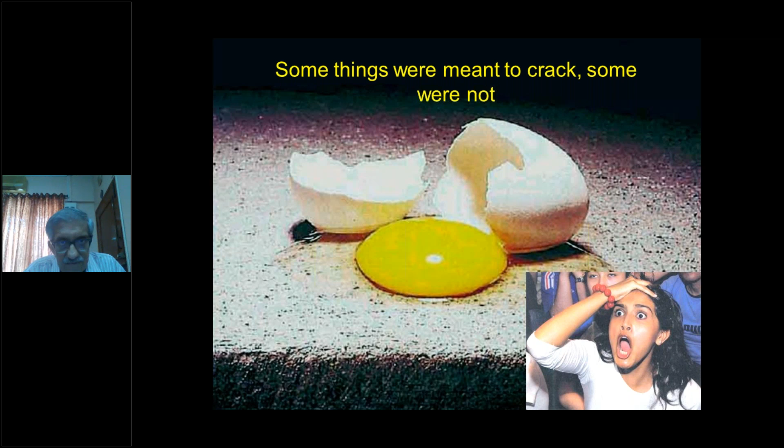We know some things were meant to crack, like the egg we have on the breakfast table. The shell suddenly cracks. Similarly, cracks come in concrete too.

Concrete is made up of two ingredients, water and cement. And when water leaves concrete, because we put additional water for workability, in addition to what water quantity is required for hydration.

On the photograph, you see an egg is cracked before it enters the frying pan. And in the right hand corner, you see a girl has cracked up. She's from Brazil, and Brazil has just lost the football finals.

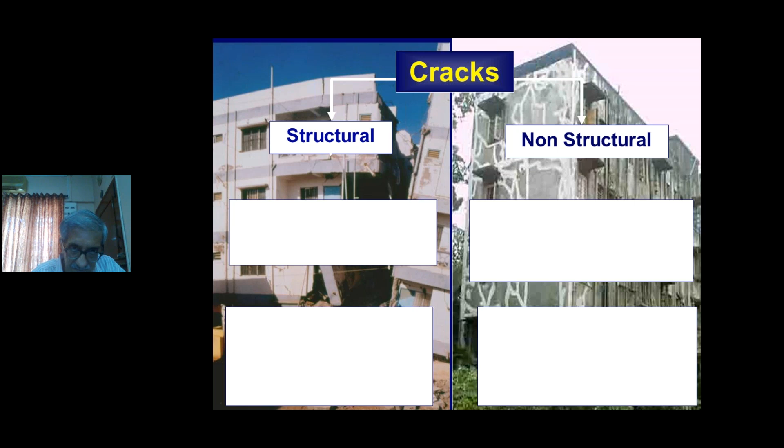Cracks are of two types, structural and non-structural. Structural are due to externally imposed load. Non-structural are due to intrinsic reasons, the nature of constituent materials, like I told you, water, cement, etc.

Limiting factors for structural cracks are structural integrity, the structure must stand, it should not collapse, and aesthetics. Nobody likes to stay in a cracked up structure. Like nobody would like to marry a cracked human being.

Limiting factors in non-structural is good design. Design means maybe even architectural design as well as structural design and concrete mix design. Proper construction is also very, very important. Proper construction includes skilled workers as well as the skill supervision, experienced and trained supervisors.

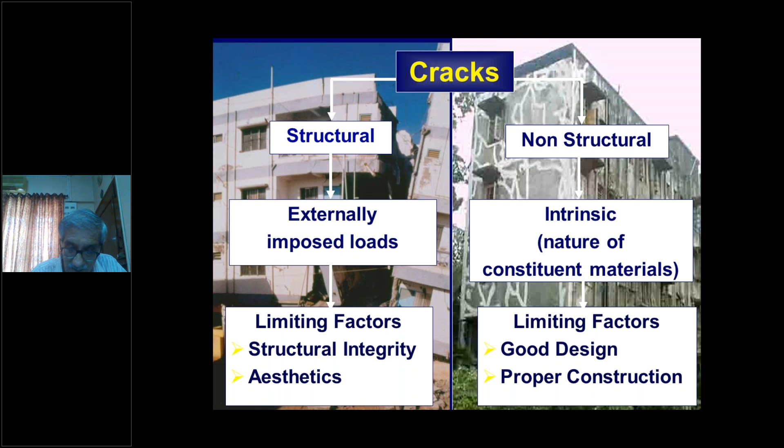Why do you like to control the crack width? First is appearance. The structure must look beautiful without any cracks. Second is the durability, because once cracks come, they widen, or even if they don't widen, they allow the moisture from outside, chemicals from outside to attack both concrete and steel.

Another thing is water tightness. During the monsoon, we would only like water to come from the taps and not from the roofs.

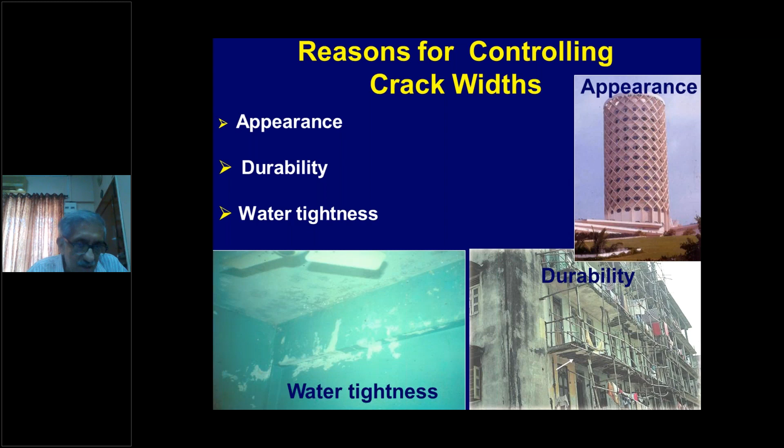There are two slides in my presentation which I will take a little longer than others. One is types and causes of cracks when concrete is in a plastic stage. When concrete is in a plastic stage, it is like a young child, has to be protected properly.

The reasons for the primary cracks, or what we say as the shrinkage or the initial cracks, come one due to constructional movement, second settlement shrinkage, and third is setting shrinkage. I'll deal with one at a time.

Constructional movement can be due to subgrade or due to poor formwork. Settlement of subgrade happens, that is the cause. Moisture changes the subgrade, lack of compaction of the subgrade, and remedy could be you must compact the subgrade and control the moisture coming into the subgrade.

Otherwise, the props supporting the formwork will start settling and you can have cracks or even a formwork failure. The formwork problem, movement of formwork can happen, swelling of wood or pressure due to wet concrete. Concrete exerts hydraulic pressure, and therefore it has to be properly designed not only for the vertical loads but also for the horizontal loads. Construction of adequate forms is therefore a very important remedy to avoid constructional movements.

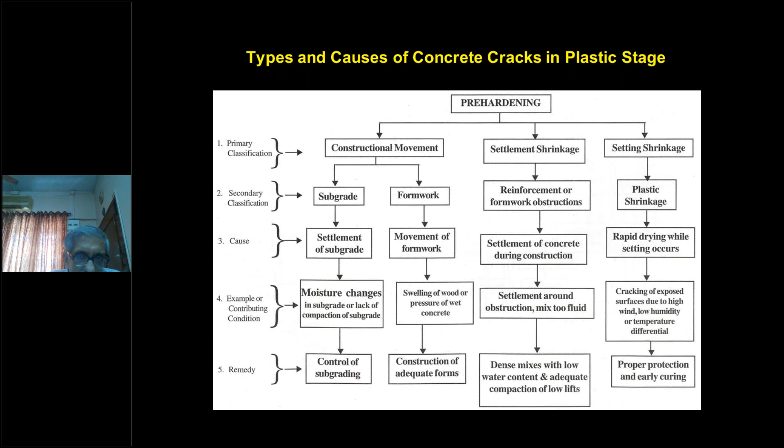Many times people do curing by several methods, sometimes totally inadequate methods, which I'll show you, and the slab develops cracks. Mind you, concrete is very young at that time, so these are through and through cracks, and very easily they will allow rainwater to seep in.

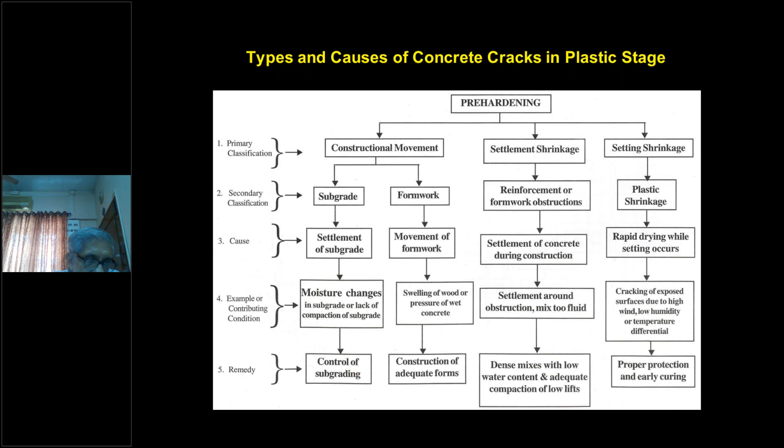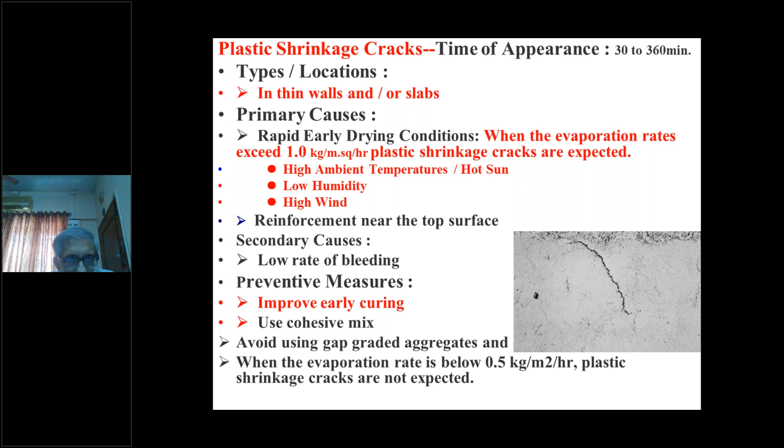We'll deal with a little more detail on plastic shrinkage cracks. Mind you, they occur within 30 to 360 minutes - it may take a little longer or it may take even shorter time. So what one must do is be prepared when casting thin walls and slabs to protect the concrete surface immediately.

It is experienced that when evaporation on the surface of the concrete exceeds 1 kg per square meter per hour, plastic shrinkage cracks are expected to occur, and this is generally so in almost all parts of our country, India. It also includes Sri Lanka and various other places where they have reasonable winters and other seasons are only warm and hot summers.

Reasons include high ambient temperature, hot sun, low humidity, and high wind. Often people ask why you need curing during the night. The obvious reason is that wind and low humidity cannot be escaped - it may happen at night also. Maybe the hot sun is not present, but loss of water is expected to take place. Reinforcement near the top surface can also cause this cracking.

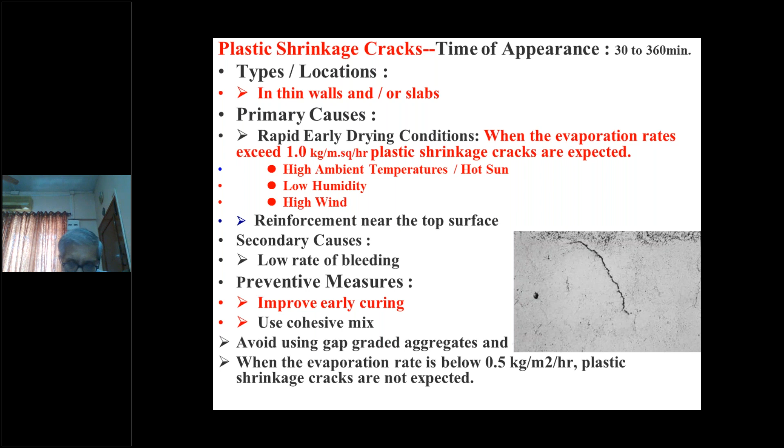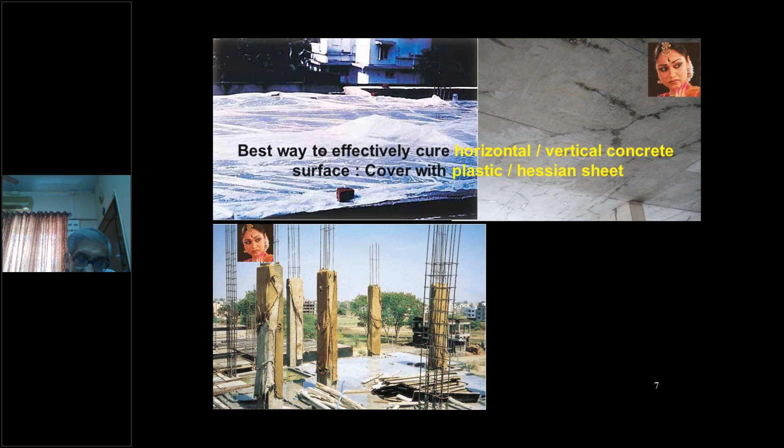So we recommended to the client who was blaming our cement, when I was working at Ambuja Cement, to put a plastic sheet. The next slab we cast in our presence with the plastic sheet, and you can see how beautifully it has come out. Not a single crack. You will be searching for the crack.

Even the vertical curing should be done with a proper cover of Hessian cloth. If you are lazy to do proper curing of vertical surfaces, maintain the formwork for some time. Mind you, it should be wooden formwork and not steel formwork, otherwise that will generate heat and you may get cracks due to that also.

So you must cover your concrete like a young child, protect it initially, and you will get good results, both from your child as well as from your concrete.

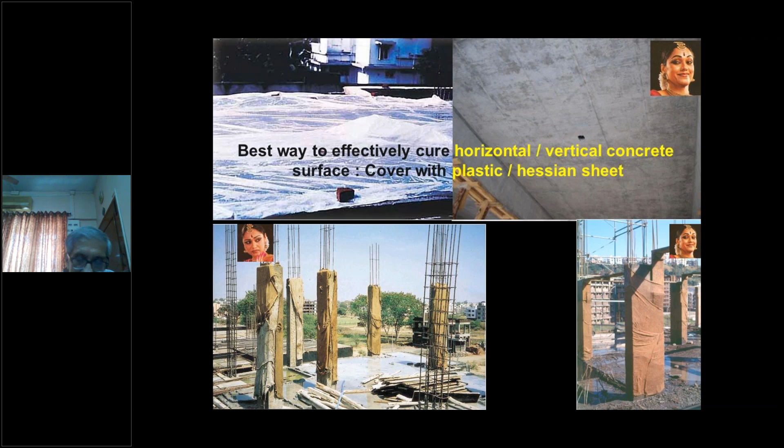I had spent quite some time in Kerala giving lots of lectures, etc. At one site I came across, which was plumb opposite a lagoon, you could say water everywhere, but not a drop to drink for the concrete. Because in Kerala, they had put a tin on one of the sites, supposed to be filled with water, but there was no drop falling on the concrete.

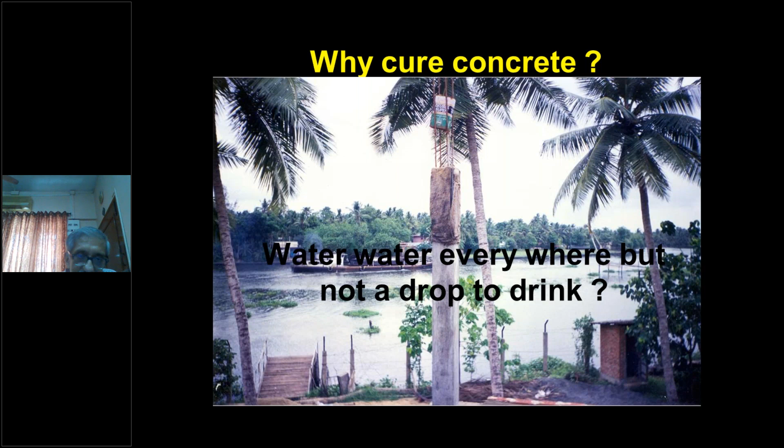So I asked the supervisor standing there, what is this for? When do you put water? He said, once in a way, when we climb a coconut tree and see the water is not there, we pour it. This is not the way to do curing anywhere. Otherwise the concrete will give you poor results.

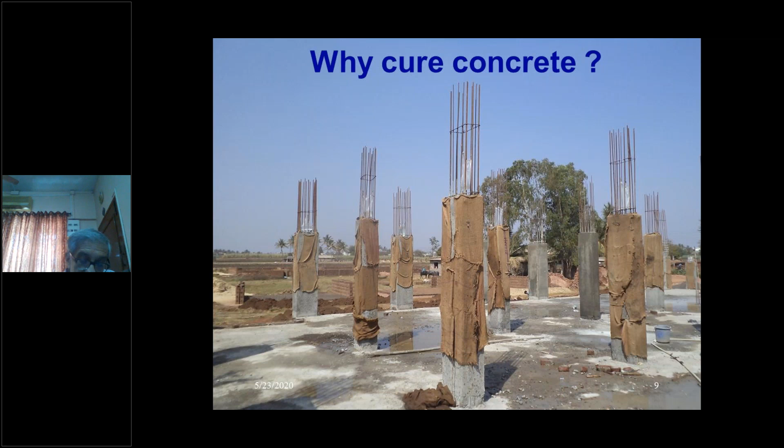Instead of putting a tin, in rural areas of Bombay, there are very few of them now, people building their houses, etc., put plastic bags with water on top. You can have a closer view. I call it poor man's curing, or concrete on glucose saline.

Again here too, there is no drop of water falling. The Hessian is dry and it's not going to protect or cure your concrete. So these sort of methods are not permitted or allowed. You have to do proper curing continuously for 7 days, day and night.

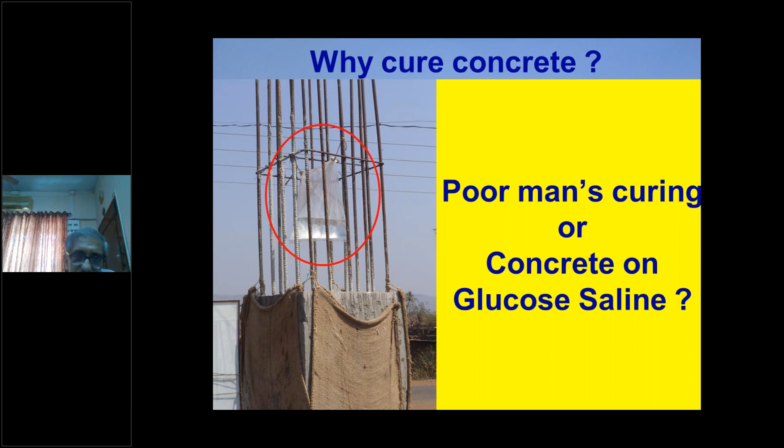Other properties, types of causes of concrete cracking after the concrete has hardened. Now mind you, concrete will harden either within a few minutes depending on the ambient temperature, or it will take sometimes days. But generally curing is specified for 7 days. If you are using pozzolanic cement or pozzolanic material like fly ash and slag, then IS recommends longer curing periods, maybe even 14 days.

If you are constructing roads which have a huge area compared to the volume of the road or pathway, then of course you have to cure it for even more than 14 days.

Initially, Mumbai's concrete roads started during the days of municipal commissioner Mr. Tinaikar. The municipality had recommended 28 days curing. As a result, even after the road was cast and the concrete laid, it was not allowed to be used for 28 days.

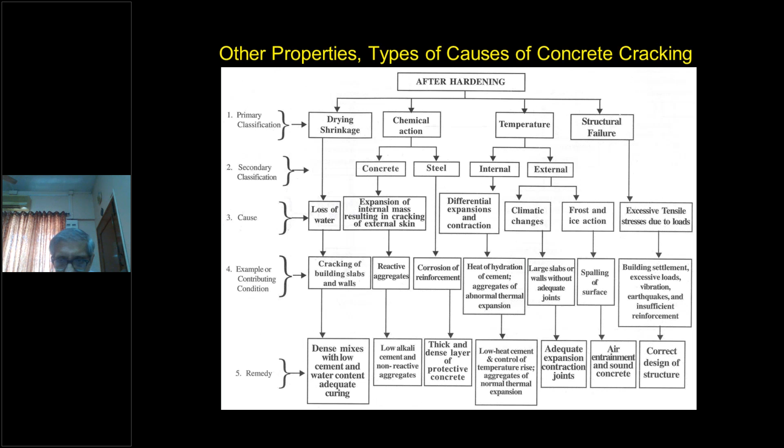So in short, we say correct design of the structure vis-a-vis which earthquake zone the structure is in, what type of climatic condition the structure is in - the structural engineer has to design it properly, taking care of all these environmental as well as earthquake conditions.

And when the first cracks came in the walls of the basement, they all blamed it on our 53 grade cement. So I was summoned to the site. I went there with my engineer.

We were seeing the cracks, and the consultant was also made to come from Delhi. While we were observing the cracks, I observed that the concrete had cracked every 6-meter interval. Every 6-meter interval.

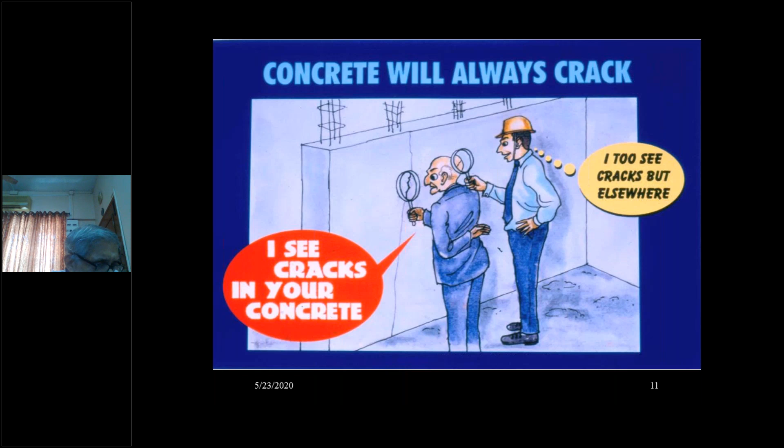The design also is a very, very important aspect. And I therefore tell the site engineers not to be easily bulldozed by the design engineer saying that the crack has happened because of poor construction. And hence this cartoon.

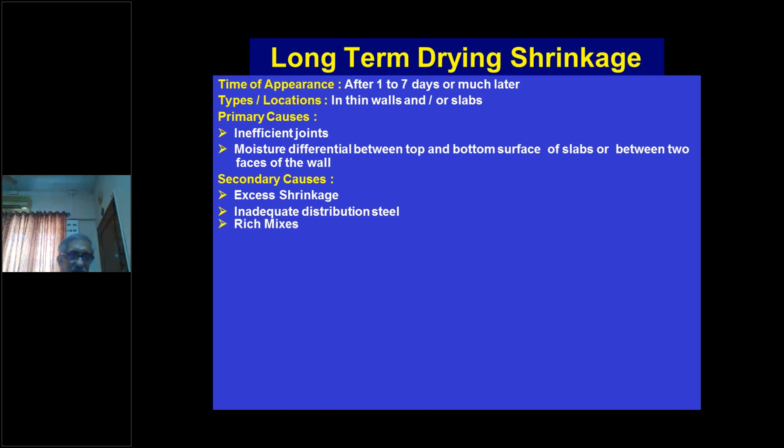Now we go into the depth of long-term drying shrinkage. It happens generally after 1 to 7 days or much later. It happens on thin walls or slabs, mainly road slabs, pavement slabs, etc. Primary causes are inefficient joints - I told you already this as one of the reasons for cracks.

Moisture differential between the top and bottom surface of the slab, or between two faces of the wall. One face may be facing the eastern side, so it will get heated up in the morning, and the western side will get heated up in the afternoon, so there will be a differential temperature.

The slabs which are flat on the ground or in the buildings - especially pertinent to road slabs - due to the differential between the top and bottom surface, the slab, though not very visibly seen, takes the shape of a saucer. The extreme thing would be like a saucer.

Now why does that happen? Because there is more moisture loss at the top and less moisture loss at the bottom. The bottom of the slab of the road is touching the ground and it gets lifted up without cracking. And when the moisture differential reduces, it goes back to its normal position.

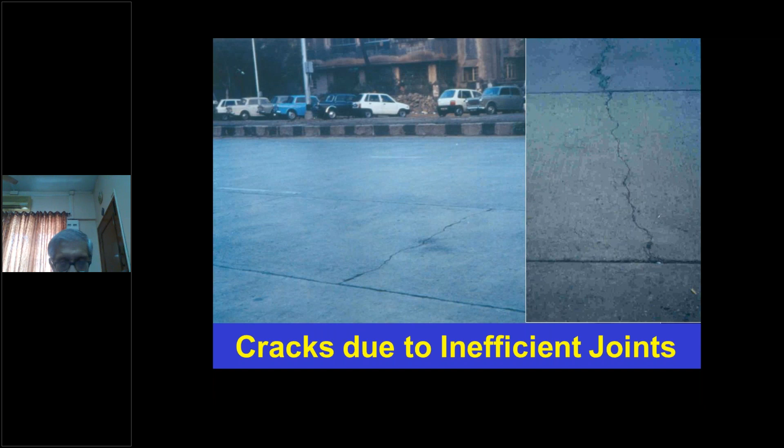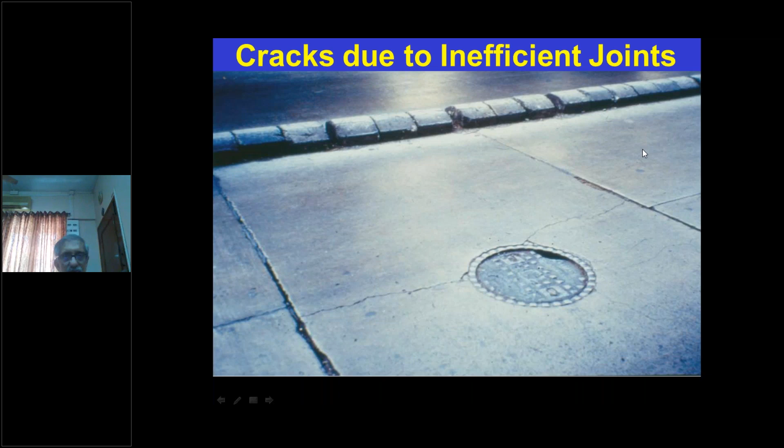Further, cracks can be classified in two ways: dormant cracks and live cracks. Dormant cracks are cracks where width will remain constant. For example, shrinkage, once it occurs, it cracks the concrete and the crack remains almost the same. But the danger is it will allow water, moisture, and chemicals in, causing durability problems. Temperature gradient cracks also are dormant cracks.

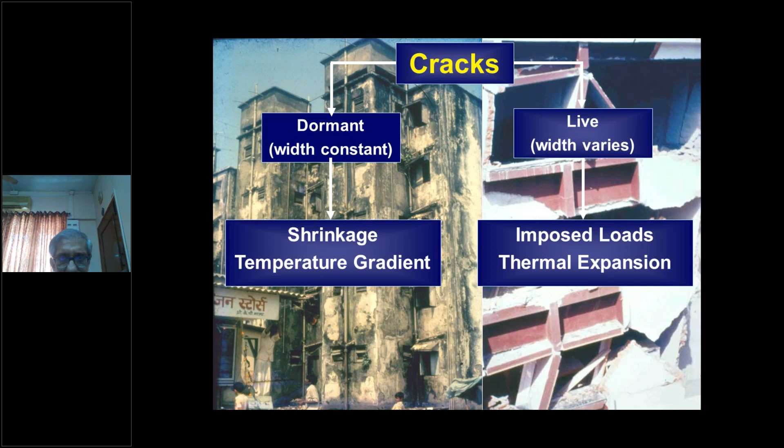But live cracks are due to imposed load and thermal expansion and contraction. An imposed load could be due to earthquake, or due to addition or alteration, or an addition itself of a heavier type, and therefore these cracks are live cracks and dangerous.

The best way to judge a crack is at the age at which it appeared. So it is always very important that the consultant must visit the site of repairs. And if it's an occupied building, ask the occupants, when did you see this particular crack? And if the occupants say, oh, we have seen it right from the day we occupied it, then it could be a plastic shrinkage crack or plastic settlement crack.

Or if the occupant says, no, we saw it about 2 years back, it could be a corrosion crack, or it could be due to extra load somebody has put in the building, or if there are different types of cracks called settlement cracks, which I'll show you a little later, this could be due to removal of early formwork and support system. So that could be initial.

Or if it has taken many years or few years, maybe depending on the type of concrete and the precautions you take during construction, it could be due to chemical attacks from outside, or chemical reaction from within, like the alkali silica reaction. So depending on the age, the engineer can guesstimate or realize what type of crack has appeared in the building for which he is being consulted.

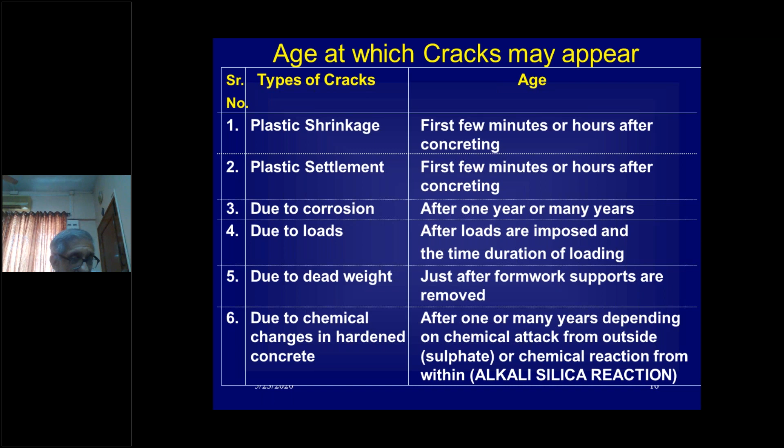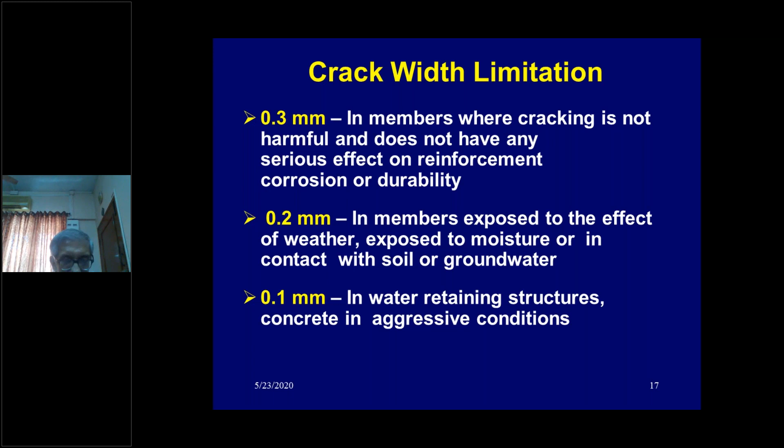If you see IS 456, it recommends crack width limitations from 0.3 mm to 0.1 mm. The 0.1 mm is for water retaining structures, concrete in aggressive conditions. 0.2 mm is for members exposed to the effect of weather, exposed to moisture, or in contact with soil and groundwater. And 0.3 refers to structural members where cracking is not harmful and does not have any serious effect on reinforcement corrosion or durability. So these are the various crack limitations.

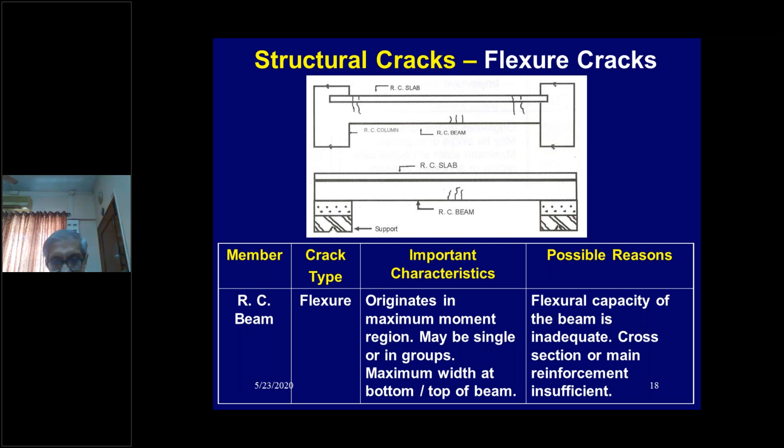Now we go into some structural cracks. The first and foremost is the flexural crack. This crack occurs in beams and sometimes even in slabs, originates in the maximum moment region, may be a single or a group of cracks, maximum width at the top and bottom, like you see in the sketch here. If it's a fixed end moment, then it can occur at the top also. And if it's a free span, then it can occur at the bottom. Flexural capacity of the beam is inadequate, cross section or main reinforcement insufficient. So these flexural cracks have occurred mainly due to the design.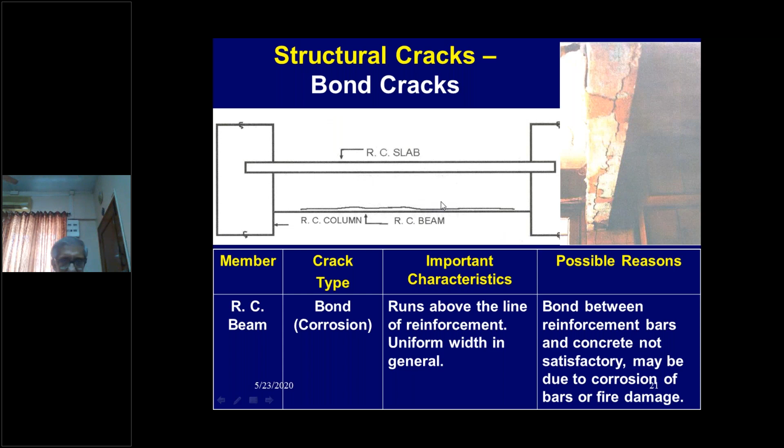Many a times there are construction joints. You see, we make an RCC framework and build the wall inside. And the wall expands and contracts in a different way than the RCC framework, and therefore you have separation cracks. Now, many a times the wall is not constructed properly from the outside, etc. So there are obvious large separation cracks appearing and allowing even the leakage of water during the monsoon inside, because there are lots of gaps left, and a hurriedly done plaster from the outside, maybe in only a single coat, etc., without first sealing all these joints.

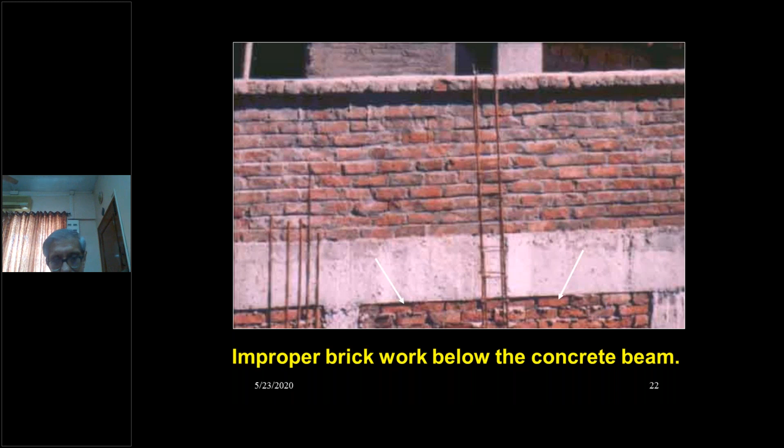So it's very, very important that when you are staying in a building where bricks and blocks are used to make walls, you must be very careful that before you do the plaster, you pack all these defective joints from the outside, because the water comes from the outside, not from the inside. Seal the cracks, cure them for at least 3 to 4 days or 7 days, and then do your first coat of plaster, and later on do your final coat of plaster.

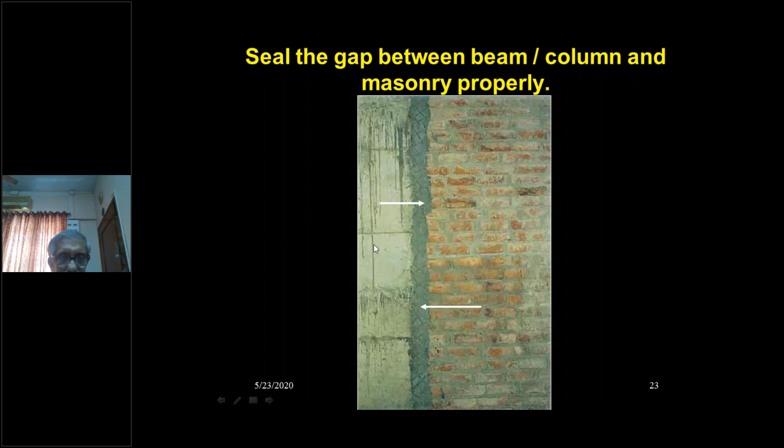This is the way you have to pack the joint between the brickwork and the RCC.

Sliding cracks occur because the formwork from below the beam during construction was either accidentally removed, or removed with full intention of making use of it at a higher elevation of the building, causing the beam to settle. Or this happens at the supports.

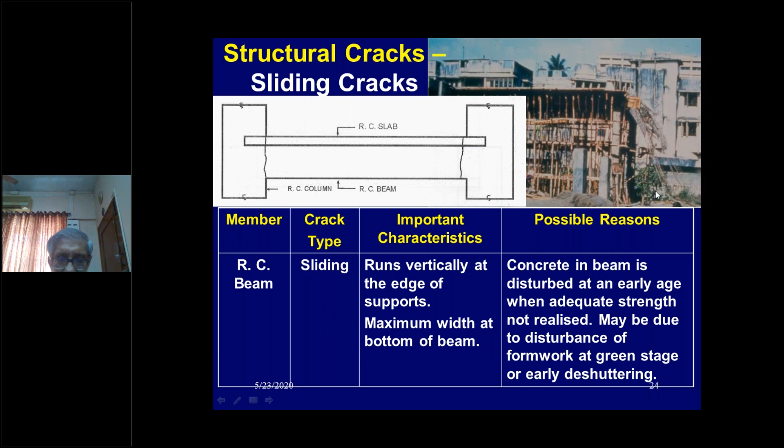These are right-through cracks due to disturbance of the formwork when the concrete was green, or due to early de-shuttering. Like this, sometimes the sliding will be very high and the entire structure will collapse.

Structural cracks, tension cracks. Unfortunately I don't have a photograph. I missed one opportunity when such cracks had appeared somewhere in Navi Mumbai. One of my engineers, who had changed his job and was working for a builder, telephoned me and said, 'Sir, there are cracks which are parallel to each other.'

I told him this could be due to tension in the beam. I asked him, 'Was it a concrete truss which had one of the beams cracking like this?' He said, 'Yes sir, it is a truss of a building, an RCC truss.' So I said, 'Find out from the consultant whether the member which has cracked is a tension member and get the design corrected.' He came back and told me, 'Yes, it is a tension member.'

So I said, 'Then your design has to be corrected, it has failed in tension.' Normally in our buildings we don't see such failures because the beams are not under tension. But in a truss, where some beams are under compression and some are under tension, this can happen and can be a serious problem, not only of durability but also of failure.

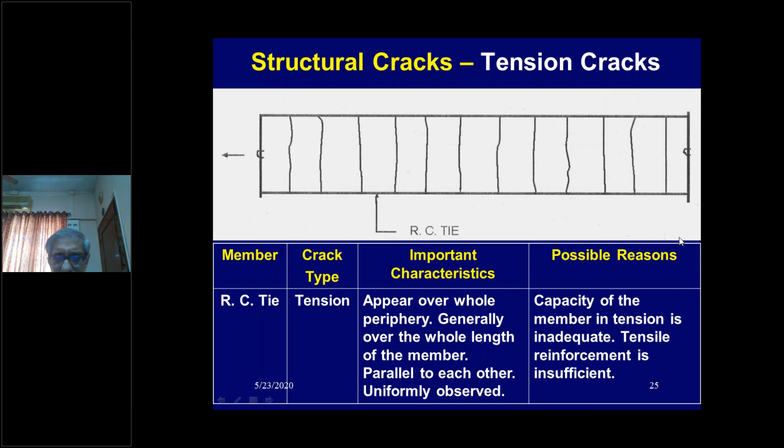Now we go to columns. Columns can crack by splitting. You can see here there are rolling shutters on either side which are now supporting the column. This column has completely failed.

During the earthquake in Bhuj, in Gujarat, many columns failed like this. The problem was that though the columns were using high yield tensile steel bars, the steel supply was coming from re-rolling mills, and the scrap was maybe mild steel or some other steel rolled into a bar that looked like a high tensile steel bar.

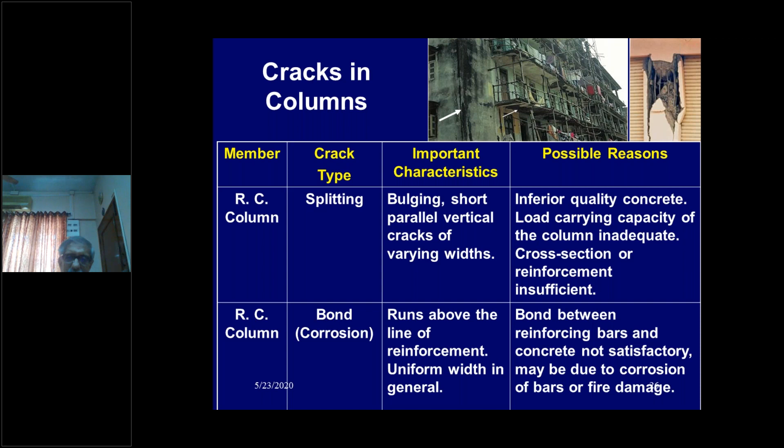Many times people in the construction industry, the masons and carpenters in charge of the building, were not engineers. They thought stirrups in the column were only to support the vertical bars until you concrete the column, so they put them at any spacing. During an earthquake, stirrups play a very important part in stopping a column from failing, but here the stirrups are either very far apart or not of adequate strength, and therefore they just separated from the concrete.

Due to the load coming from the top of the building, the concrete actually got crushed, and it looks like a cube failing in compression without any steel. So this is a crushing failure, and the entire column has split. Therefore this building cannot be repaired, it has to be reconstructed. There are several columns like this, but fortunately some columns failed and some did not. I really don't know what has happened to the final state of the building.

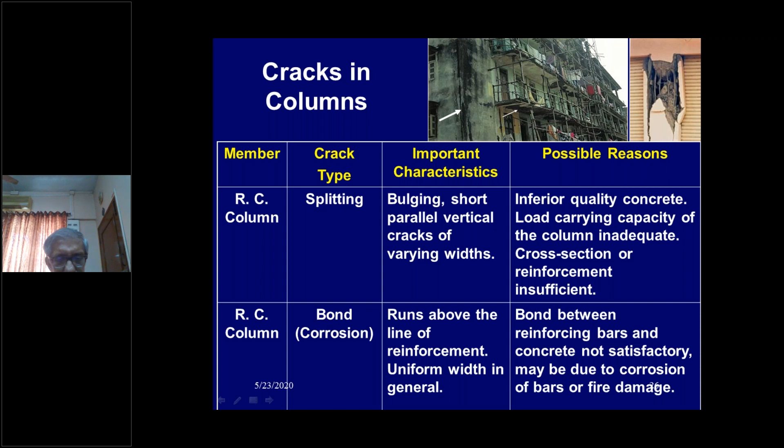Another type are the bond cracks, wherever there is corrosion. Here there is more corrosion in the balcony slabs etc., due to thinner sections, less cover, and more exposure to rain. There are cracks in the column too. So the bond between reinforcement bars and concrete is not satisfactory, maybe due to corrosion or fire, but here it is due to corrosion.

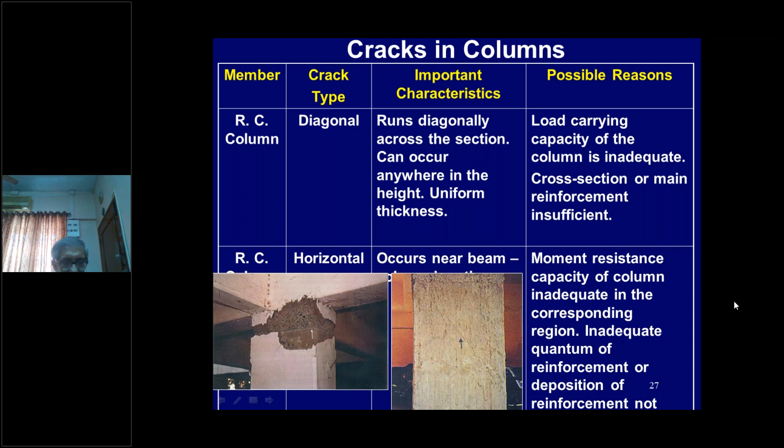The others are horizontal joints. Generally we construct a column up to a certain height, then put beams and slab on top with a small region of the column, what we call 'column ka topi', the cap of the column. Luckily here only the plaster peeled off, and the construction joint showed a visible horizontal crack, but the concrete was good and solid, so they could restore it by replastering the building at the basement. No need for very laborious repair, because it was only a construction joint exposed due to the shaking of the building during the earthquake, and some plaster peeled off.

Now let's go through this Tuutti model. It was developed by Tuutti, I don't know the exact year, but you can see there is an initiation period T1 and a propagation period T2.

When concrete is born, it is alkaline. This alkalinity around the steel does not allow corrosion. It inhibits corrosion, so when chlorides or water start penetrating the concrete, for time T1 no crack appears. Once chloride and water enter the concrete, gradually the alkalinity is lost and corrosion starts, and it goes on increasing and increasing.

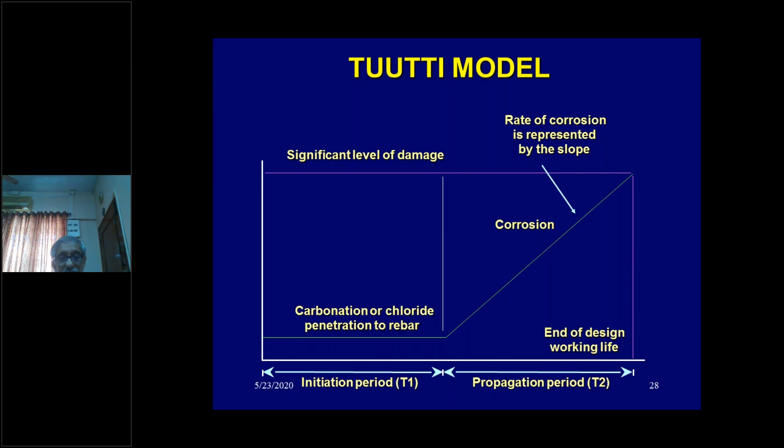This continues till the end of life comes and the building collapses. Suppose you repair the building at this stage - if the repairs are good, you can gain another T2 or T3 life, and then T3 will start later. So every time you repair a building sensibly and properly, you increase the life of the structure. And if there are structural cracks, just repairing will not do - you will have to strengthen the structure.

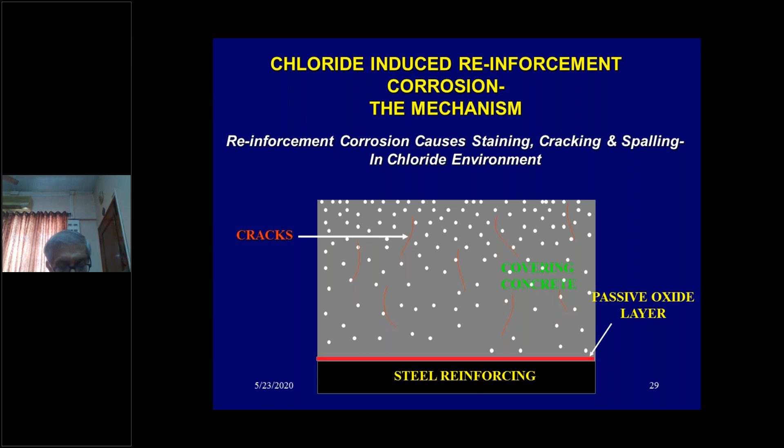There is a nice model made. You can see there is a passivating layer which does not allow the reinforcement steel inside the concrete to corrode. Even though there are minor cracks, they are all isolated. But when chloride and water start seeping in, the cracks unite and pass water onto the bars, and then you see flaws - reinforcement passivation is lost, and corrosion happens.

We always say united we stand, but for cracks you should say united you fall, because then they become dangerous. If the cracks are isolated and not united, your building can have an extension of life till they get united, maybe due to loading, unloading, water seepage, etc., due to any reason.

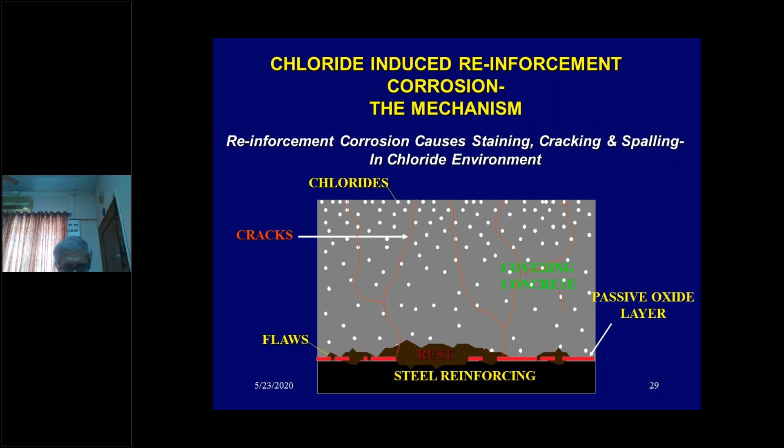This is a beautiful building, a PWD design - the ESIC hospital in Ahmedabad. This photograph was taken just after the earthquake. There were some patients in the hospital. The engineers felt that after the earthquake, a lot of spalling and cracking was observed.

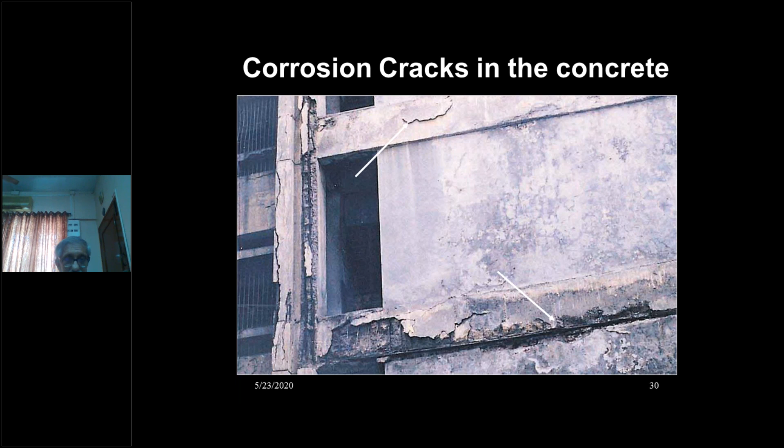So it was time to evacuate the hospital and tell the patients to leave and go to some other hospital. I'm showing this as an example where the design was good - the building did not collapse like many buildings in Ahmedabad, but it was just good enough to allow the people to leave. The main reason for such deterioration was poor maintenance. So it's very important that good design be supported by good maintenance if you want infrastructure like hospitals to survive the calamities human beings face.

This is a building - there were three buildings, and one of them collapsed in one of its wings sometime in '94. They are called the Poonam Chambers. Originally, the architect had made a nice facade with marble on top and some fins for architectural effect.

But it was facing the creek near Worli, a very corrosive environment, and maybe not constructed properly in those days. Therefore the concrete started spalling and the protection of the marble was no more. It also started falling on the parking lots and on people below.

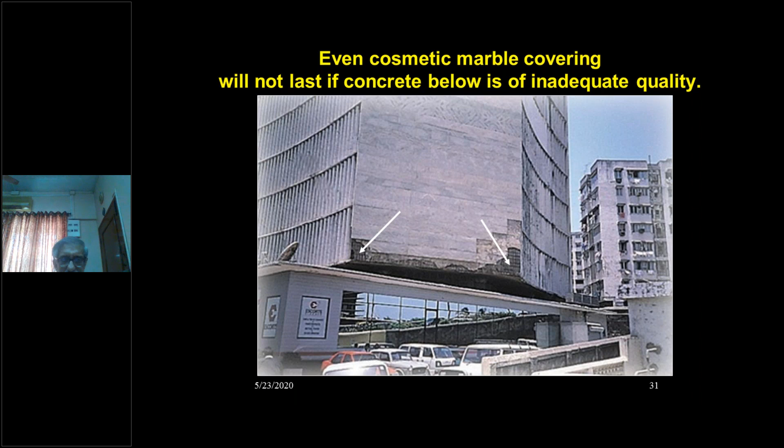After the collapse of the adjacent building, they decided to refurbish Poonam Chambers 1 and 2. They removed the marble, removed the concrete, removed the decorative fins, etc., and depended on steel and aluminum to give the facade of the building. So cosmetic effects don't last if the concrete below is not good.

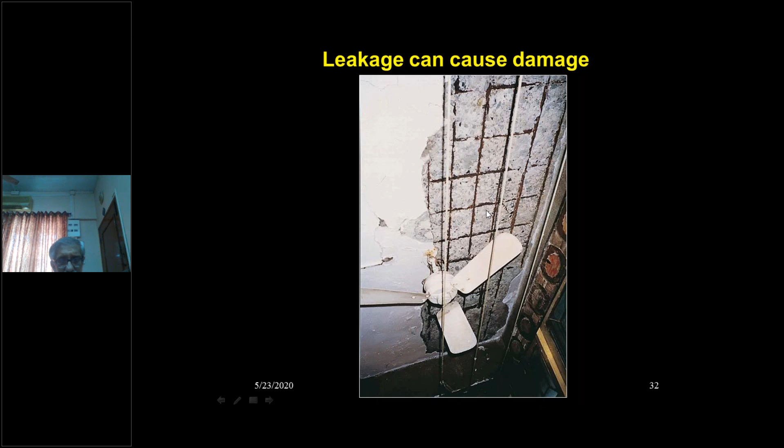Here you can see a typical slab of a badly damaged building due to monsoon but delayed repairs. We are lucky that the fan is still on the ceiling - it could also come down. This is all due to leakage damage, corrosion, etc., and spalling of concrete.

One important lesson I have learned is that curing is a must. You cannot neglect curing because it is the last step of concrete making. Curing is very, very important - it increases the life of the structure, because with good curing you can gain strength of the concrete, even of the plaster. A well-cured plaster without cracks can even afford some protection against future corrosion of the bars, etc.

It may not give you the strength a structural member gives, but it can give the protection that otherwise would not have been there if the plaster didn't exist or was badly constructed and cured. I'll give you one example: Chandigarh city. The well-known French architect Corbusier had designed most of the buildings when it was first built, and he had the fancy notion that we should make form-finish concrete - he specified everywhere form-finish concrete without plaster.

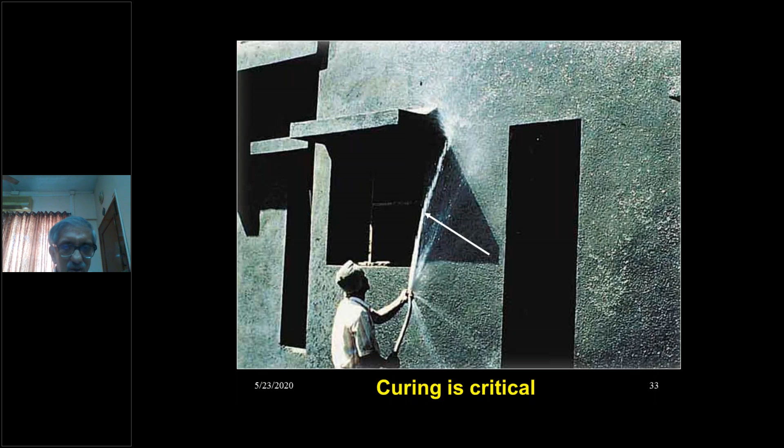After years, a lot of Corbusier's form finish concrete buildings had to be extensively repaired. Why? Because the plaster was not there. If plaster had been there, the form finish buildings would not have looked form finished, but like our normal buildings, and would have had protection. Chandigarh is not a place with excessive corrosion, but the concrete was designed that way. If they had used the high strength concrete now specified for high-rise buildings in Mumbai, it could survive form finished, but M20 and M25 grade concrete cannot. I'm sure this must have been M15 or M20 grade concrete when Chandigarh was built.

Now we come to the fancy part of my presentation. I could not get all the photographs, so I have made sketches and given them.

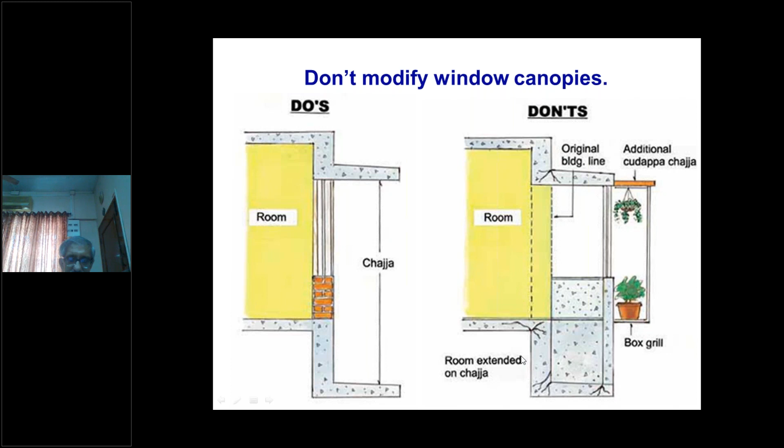This shows how carelessly people or occupants modify their buildings - the do's and don'ts. On the left is the original chajja and window. Some occupant, without the architect or engineer knowing, wanted sitting accommodation, so he added concrete on the chajja, which was a cantilever, loaded it, made a sitting arrangement with pots to beautify. But the original chajja was not designed for this, so cracks developed. People do lots of architecture of their own and destroy the building.

A balcony is kept for people to see the beautiful birds and trees outside. But somebody in the family got married and needed an extra bathroom, so they converted one of the balconies into a bathroom. Can you imagine putting this heavy bathroom utilities inside a cantilever slab? Then they do plumbing, and the balcony at the lower elevation leaks, so neighbors complain. One has to ban all these additions and alterations.

Many buildings have had their life curtailed because of erratic additions and alterations. The municipality has now become more strict, at least in Mumbai, but I hope this strictness also culminates in stricter action against people who do this sort of additions and alterations.

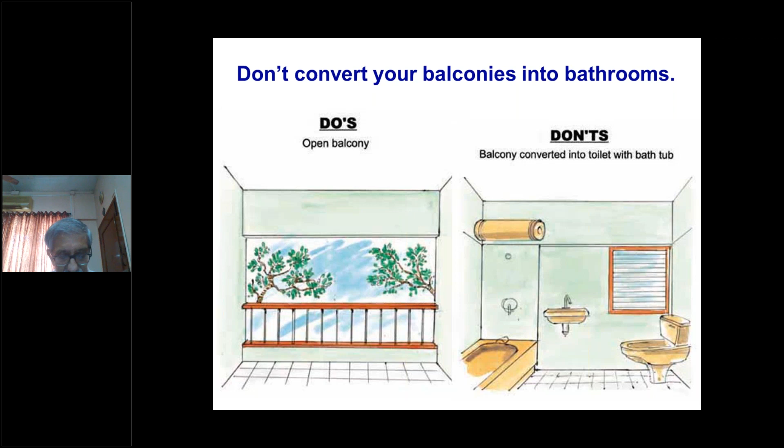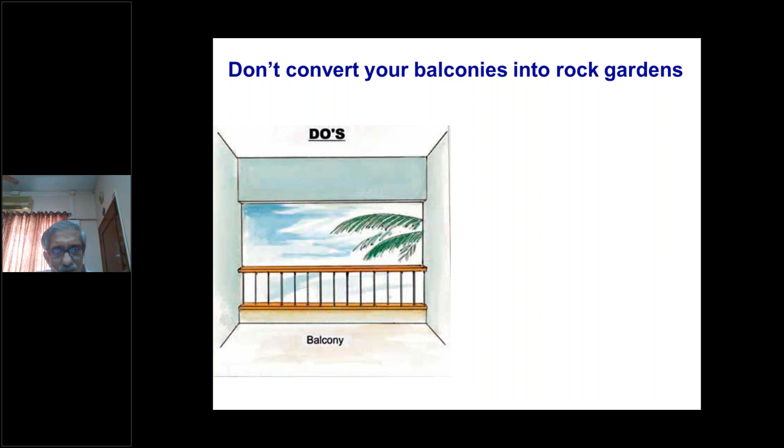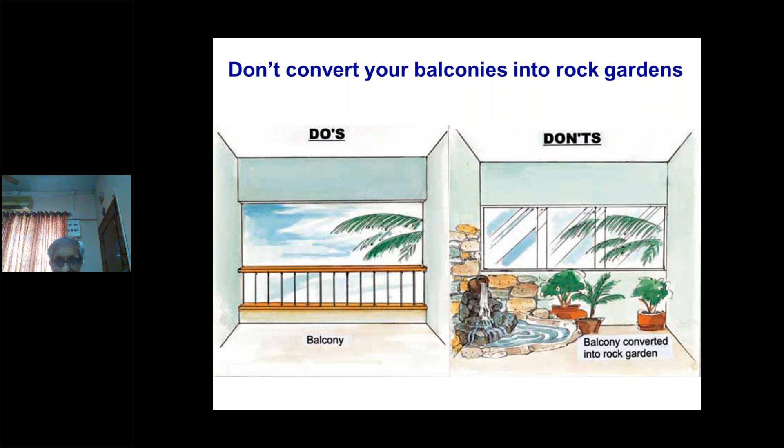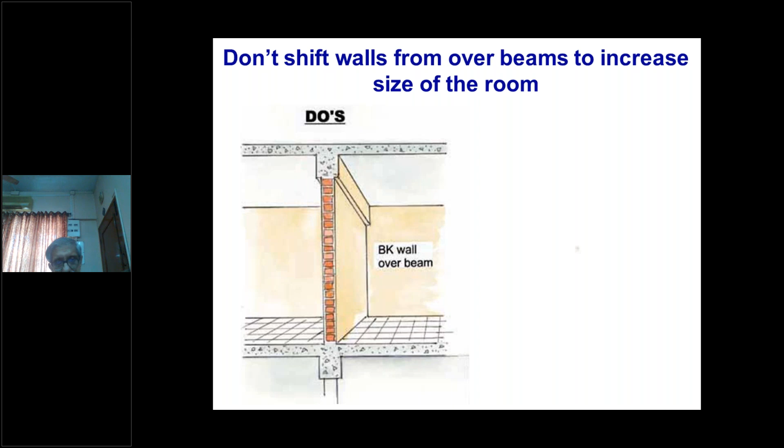Sometimes people would like to shift a partition wall thinking it's only a brick wall, hoping it's not an RCC shear wall - they don't bother even about that. They shift it because they want one room bigger than the other, transferring the lightweight wall. Even the consultant will give permission for this because it's a thin wall. Yes, the structure may not collapse, but it will get eccentric loading due to the lever arm and develop cracks, creating problems later because the wall is not in its original position where it would have transferred load onto the beam and column below. This is very important - people take it lightly, and even some engineers certify such things.

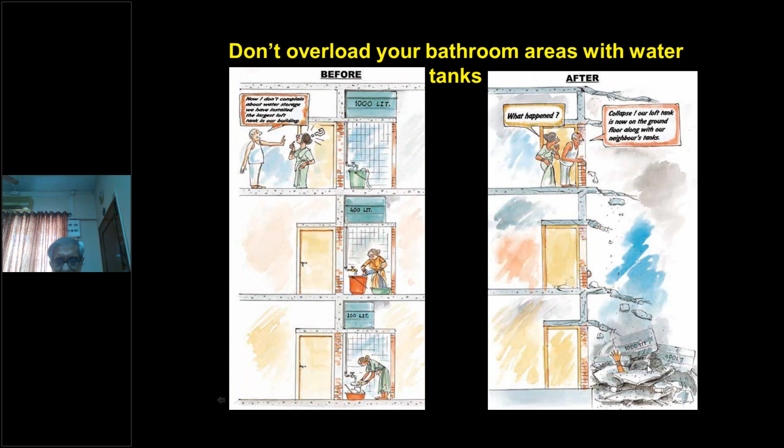This is the husband pacifying his wife, saying don't worry, now there will be no water supply issue - I have the largest tank installed in our toilet block. After some time, the entire toilet block along with all the tanks, and the neighbor below, collapsed. The building has collapsed.

This sort of thing is also happening. Remember, toilet blocks and kitchens are all wet areas, and if the original RCC is not done properly - especially in old buildings from the 1960s and 70s - earlier buildings done in the British Raj were of much better quality than later ones, when there was cement scarcity, etc.

This resulted in many buildings losing their bathrooms, balconies, and all the wet areas because they had heavy corrosion that wasn't repaired, and so they collapsed, plus there was the additional weight of the water tanks.

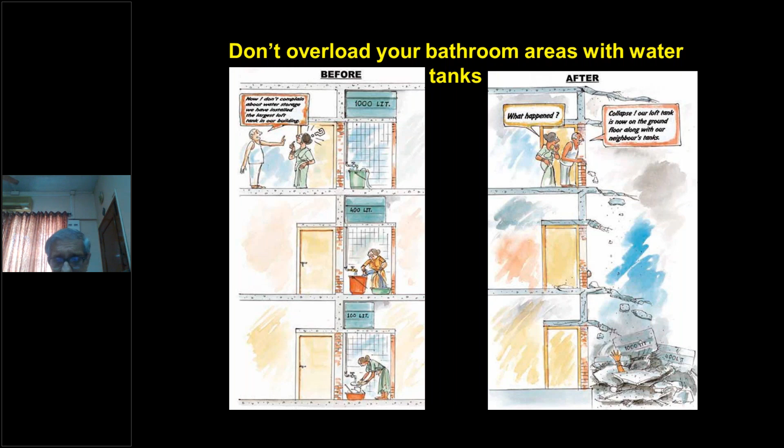In those days, mind you, they were all steel spare parts of Ambassador and Fiat cars. Nowadays we have plastic spare parts, so they may not be that heavy. This resulted in a collapse, and this building, even though called Akash Deep, was no longer giving light in the Akash - it just came down. 7 people died.

The building collapsed at night, fortunately. It was located at handshaking distance from the rail track between two railway stations, Bombay Central and Churchgate on the Western Line, from where the local trains used to pass. Luckily it fell at night - there were no locals running. Had it collapsed and fallen on the locals, many people would have lost their lives. Only 7 people, who were incidentally watchmen and footpath dwellers staying in this isolated commercial building at night, fell prey to the collapse.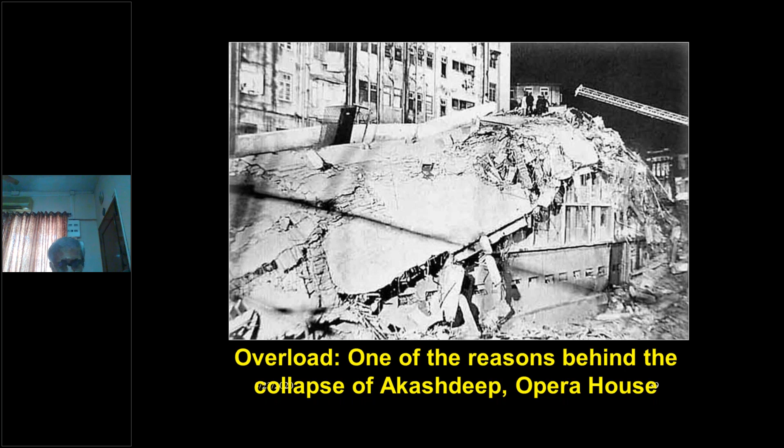Many times people think that RCC, oh, it can be tampered with, it can be changed, plastered again. So they put their electrical conduits, sometimes even water supply pipelines, etc. Sometimes they don't remove the old flooring and add additional flooring tiles every alternate year because the height doesn't matter - it's good enough for people to walk inside the room. But this adds load to the building and certainly damages the RCC work. Even if you do it in brickwork it's okay, but not in reinforced concrete - very, very dangerous, especially if you are concealing the pipelines.

I have seen in many old buildings people going about doing such rectifications - or I won't call it rectification, I'd call it additions and alterations - and have damaged the buildings. Some of them have even collapsed due to this.

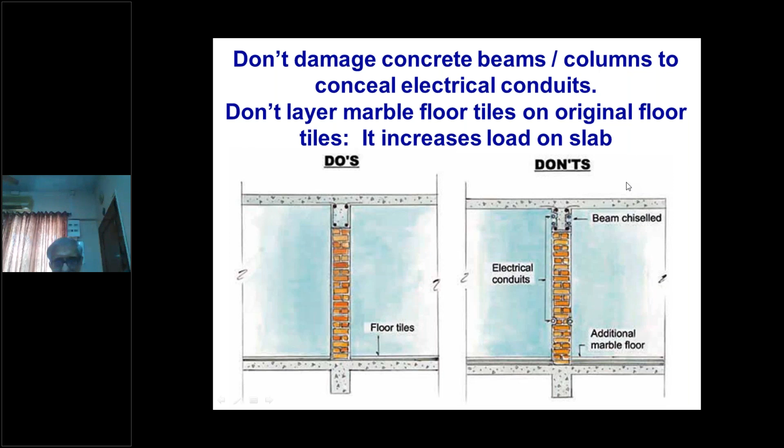I would say these are the butchers of our buildings - they slaughter the building, and sometimes the building falls. Luckily this building did not fall, but I was invited by one of my Tata colleagues because he had a flat there and told me somebody has done this. I had to explain to them that whatever you want to do, don't touch the columns.

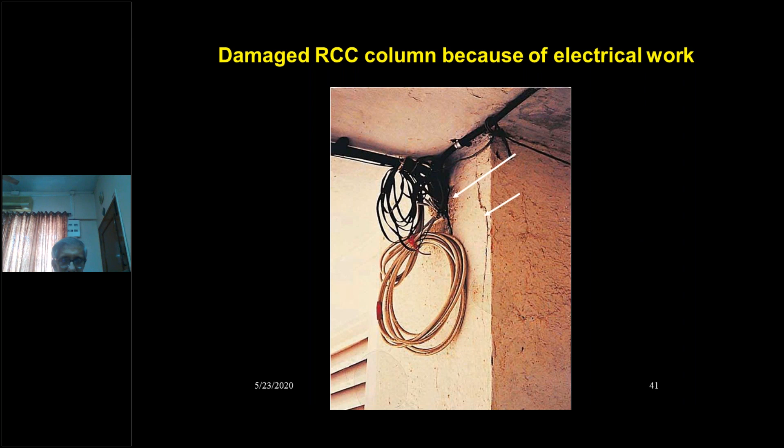A jeep used to come and the carrier on the jeep used to hit the beam. So the owner of the jeep was smart enough to convert the beam into an arch - he removed all the bottom steel, maybe even some shear bars, etc., and shaped it so that his jeep with the carrier could now enter the business premises.

Should an earthquake of the type that hit Bhuj take place in Cochin, we may see this 9-story building come down. So until then, you can cross your fingers and wait for such a calamity to occur. This is again sheer murder of the beam - you can see it.

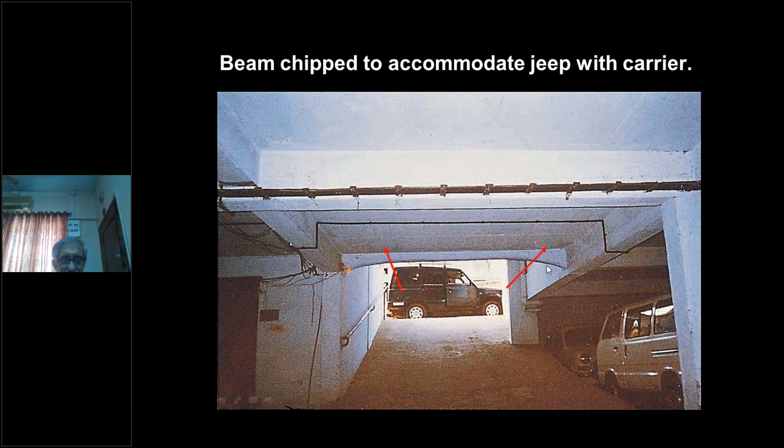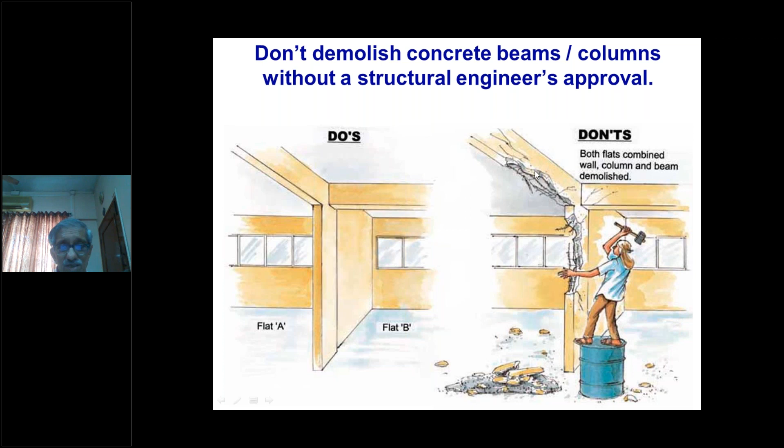There are many people residing in Mumbai, and there are many buildings designed to withstand earthquakes, with shear walls placed between the columns - RCC shear walls. But many people think they are just like brick walls that can be demolished and removed to make a room bigger, and many people have done these changes. The buildings are surviving because an earthquake may come at any time, or may not come at all in my life or in everyone's life, and the building may remain safe. But should a building face an earthquake with the shear walls removed, there could be a very big failure.

This is a different problem. When Bombay city was being extended through the creek areas, which have very soft clay and needed very good foundations, the foundations were done in a bad manner, and some buildings actually started sinking. Some faced differential settlements, started cracking, and were on the verge of collapse. So they were demolished and rebuilt after making sure the foundation below was proper. Foundation is the key to the safety of a building. Foundation repairs are the costliest - you may even have to demolish the building and rebuild.

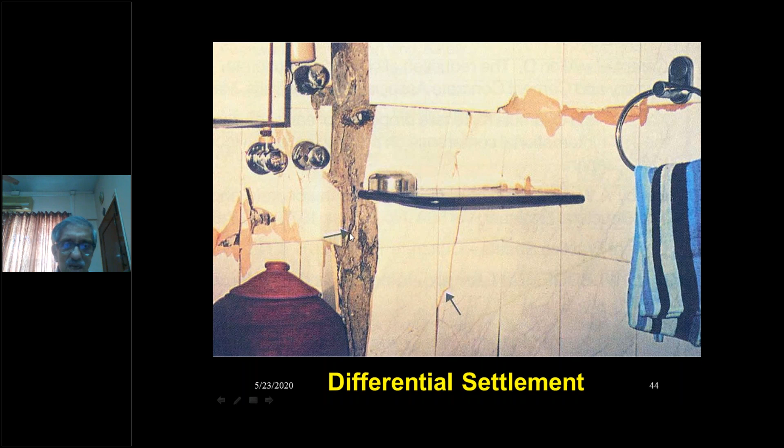So all the more precautions are necessary for constructing new foundations. I was involved in construction of a power station with tall chimneys and heavy loads in a creek area. We constructed that with proper precautions, proper foundations, design and quality control. So there are no differential settlements even after a span of 30, 40 years, and no problem running the power station. So if you construct things properly it works, whereas this building had to be demolished within a few years of its construction.

One more building resulting in eventual collapse - this was a building called Shiv Chandan building. We give very good names to our buildings, in the name of God, etc. This was a 4-story building. There were 2 buildings, one behind the other, built by the same builder at the same time. The building in front had a bank on the ground floor, with the rest residential. There were very big cracks and corrosion to the structural members of the building - not human beings - and the building was in bad shape.

One fine day when it was pouring in Mumbai, bank employees came to work on the ground floor and heard some creaking sound coming from the RCC building. They alerted the manager and said they could not work in this bank, that it was very dangerous. The manager, like all managers, said, no, no, carry on, this has been there for the last 15, 16 years, no problem, carry on. But a wise man called the fire brigade as well as the municipal authorities, who saw some chunks coming down and said to immediately vacate the building.

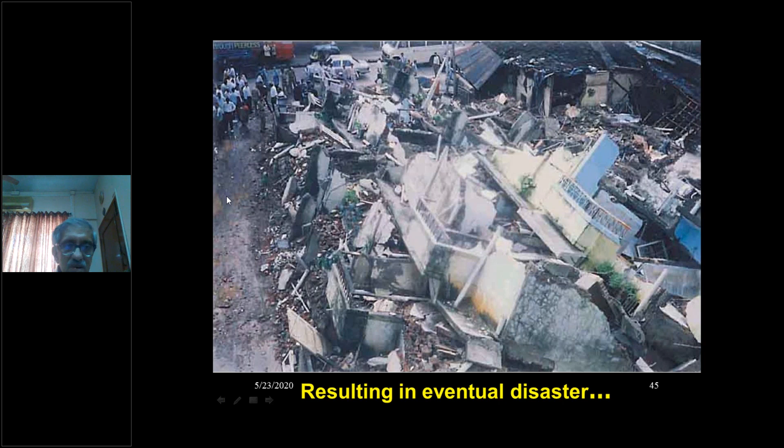Then I told him, go and meet my friend who is staying in the adjoining building. He went and met him also, and later on, the whole thing was exposed. Even my friend's building was demolished and reconstructed because of the same reason. They also found the foundations on sawdust. So what does a poor architect and poor designer do?

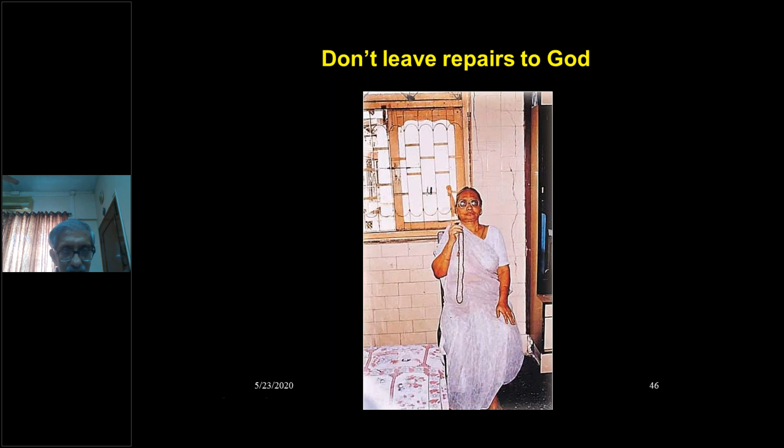Now, just to end my lecture, this old lady - we had gone to inspect one of the buildings, and this old lady was praying. So my engineer who had gone there asked her, Madam, how are you? She said, okay, I am old, and now my problem is, first somebody told me there were cracks in the wall and column, that I repair it with tiles. So I spent a fortune repairing the entire flat with tiles, and now the tiles are cracked. And now they are telling me they want to repair the structural members of the building. I have no money, so that's why I am praying.

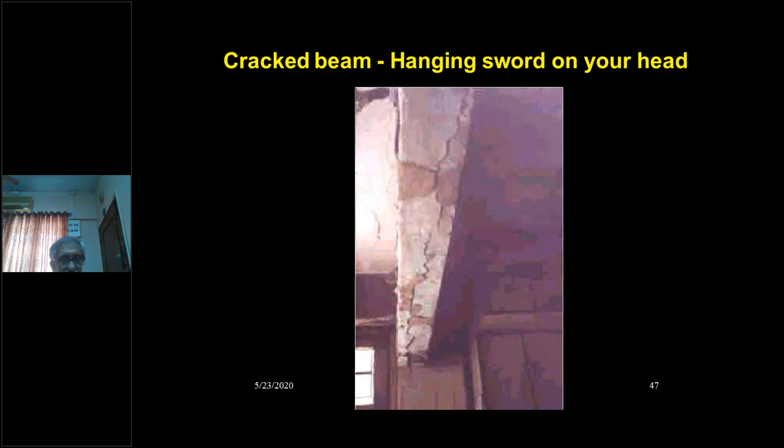Maybe her prayers will be ended soon because she's sitting below this beam. If one chunk falls on her, all her prayers will be ended - she won't need the repairs, she won't be there. So this is a very important thing: repair properly, maintain it properly. No slipshod way of repairing it should be allowed.

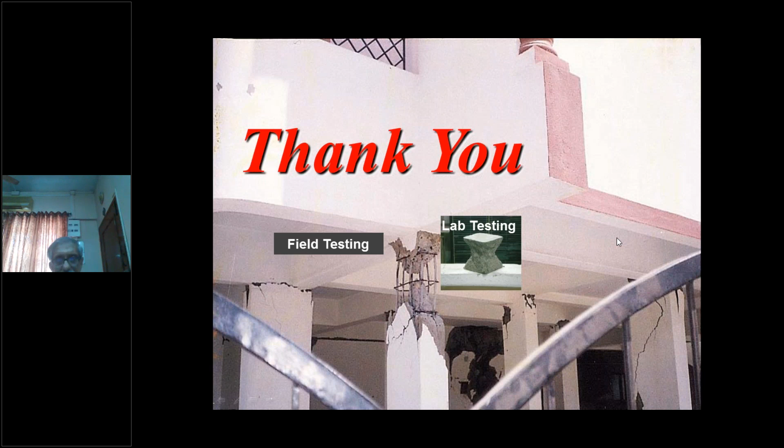So I end my lecture with a big thank you. I'm thanking the designer for designing this building with long beams so that even if one column in between got crushed, like the cubes which we crush every day in day-to-day testing - this is the field testing of our concrete, and this is the lab testing.